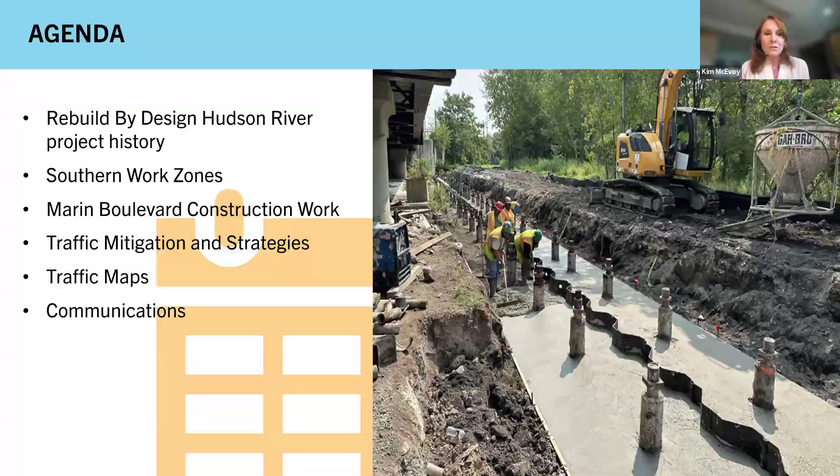But before we go into these specifics, next slide please. I'd like to introduce Mayor Bhalla of Hoboken for some remarks, and we appreciate your attendance today, Mayor.

Thank you, Kim. Good evening. I want to thank everyone for joining us today. I also want to start by expressing my appreciation to the New Jersey Department of Environmental Protection, really for your unwavering support and for your leadership on this project.

So today we're here to learn about the next phase of construction for Rebuild by Design, which, as you may know, is a federally funded, state-led initiative that was born out of the destruction that we saw and the devastation of Hurricane Sandy. So the next phase of this construction, which will lay the foundation of a deployable gate, is on Marin Boulevard to protect Hoboken against storm surge flooding.

That measure is one of many layers of protection being implemented, which includes, in addition to the gate, green infrastructure, stormwater detention, and other measures and systems to reduce the city's flood risk.

As many of us know, Hurricane Sandy caused widespread flooding in Hoboken, with over 500 million gallons of water inundating our streets, homes, and businesses. And what we're doing in this whole project of Rebuild by Design is trying to make sure that kind of destruction, that kind of horror, really never happens again.

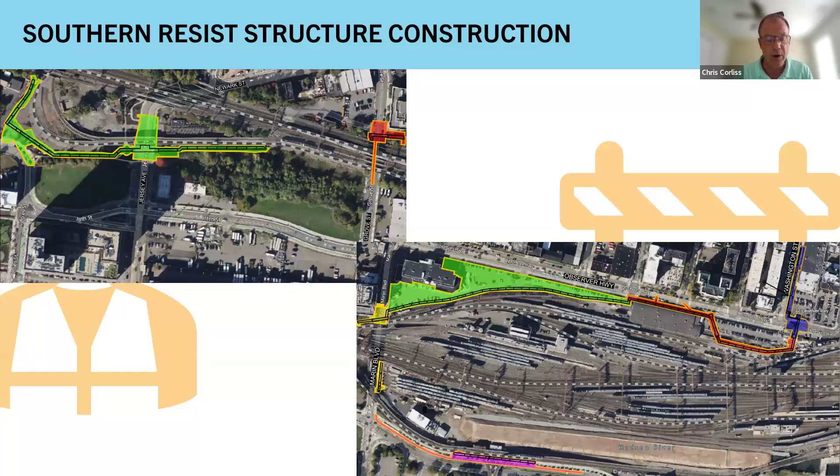These images depict where the work locations are: Jersey Avenue, Grove Street, over in the New Jersey Transit Yard and up Washington Street, and Marin Boulevard, which is where we're here to talk about tonight. Next slide, please.

So what's coming up on Marin Boulevard? The construction plan was developed in two stages, with consideration of safety, efficiency, and long-term durability of the final construction. Currently, the tentative start is the week of July 21st, and the closure is anticipated to be approximately 4 months.

Working down along the slides here is a generalistic progression of work. The first work occurring will be utility work - utility pole relocations and removals associated with PSE&G. Then subsurface work, including micropiles, sheet piles, jet grout installations, the wall foundation, as well as the structure - the slab that will go across the road, as well as the rails, new curbing, sidewalks, roadway paving, and pavement markings.

Currently, they're looking to do a second closure, which will be much shorter, next year - that's when the gates are anticipated to arrive. The gates are currently being fabricated in North Dakota, and they'll be shipped to Minnesota for final painting and then shipping to the site. So next summer, the gates in this location will show up and be installed. Next slide, please.

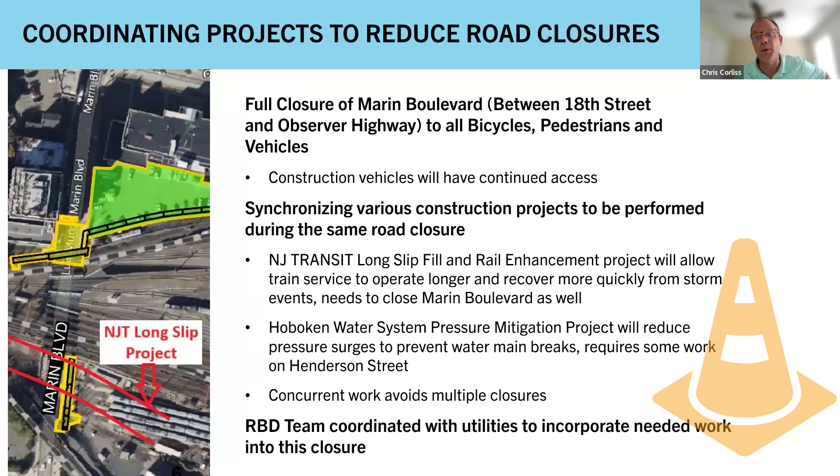Next slide, please. So we looked at different alternatives - could we open one lane of traffic? Could we open roads up at the end of the day? On the slide on the left, you'll see the yellow highlight is basically the final foundation of the system, of the structure going across Marin.

Now, there will be rails - think like rails as in train track, not like light rail type tracks - that'll go across the road. Those need to be set, and the foundations need to be poured as a monolithic pour, and those rails need to be installed at a very tight tolerance, so we need an uninterrupted run of track as per the design.

We did look at whether you could reopen the road at the end of each workday. Those foundation widths are quite large, so to steel plate or cover the excavations at the end of the day isn't safe. We also looked at whether you could do it with a constricted calendar, say only in the summer, but that would just increase the overall impacts and project duration. Next slide, please.

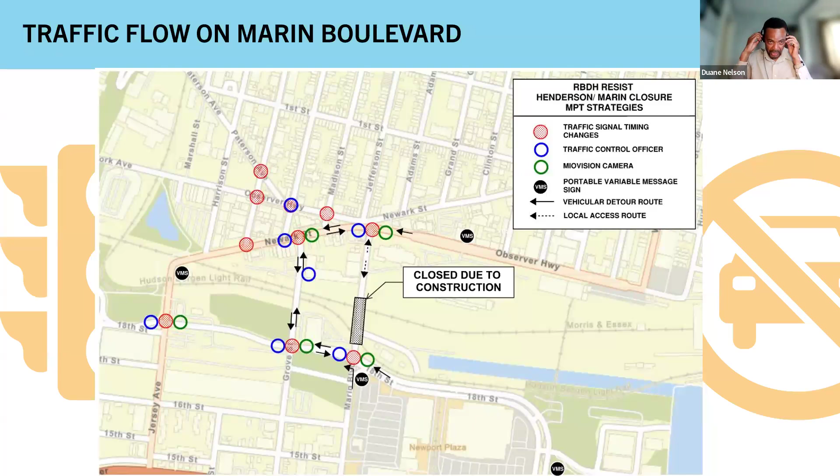What you see on your screen here is a map depicting several things, some of our strategies to help mitigate traffic as best we can. So we see Marin Boulevard, the closure area underneath the tracks. You see a number of symbols, and I'll run through them for you. The red circles with the red hatch are intersections where we have identified timing changes to be made to better handle the flow of traffic underneath the detour conditions.

The blue circles represent where there will be either a Hoboken Police Department officer or Jersey City Police Department officer to assist in directing traffic at the intersections immediately around the closure, along Observer Highway, Newark Street, 18th Street, and also an officer at the entrance to 700 Grove.

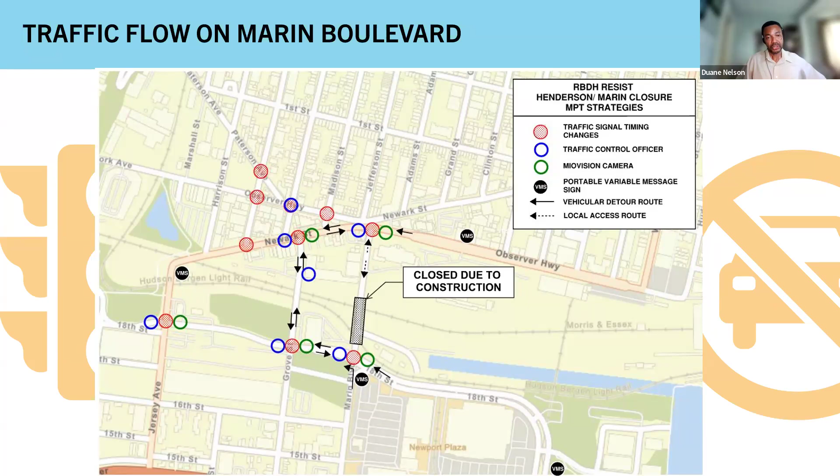In addition, these green circles represent intersections where we have cameras, which not only provide the team with live views of traffic, but also traffic statistics such as counts. They are integrated with the traffic signal controller, so they're able to provide us feedback on what is the best timing for the time of day.

There's also one other symbol I wanted to point out: these black circles with the letters VMS. That acronym stands for variable message signs. We have installed, or are going to install shortly, up to 6 around the area approaching the closure, alerting motorists of the upcoming closure, and then once it's in place, of the detour route, which is represented by these solid black arrows.

So if you're coming west on Observer Highway out of Hoboken, you will not be able to make a left onto Marin Boulevard except for local access to the few businesses and NJ Transit north of the actual closure. Otherwise, all general public would have to go west to Grove Street, make a left down Grove Street to 18th Street, make a left there, then a right back onto Marin Boulevard. From the other direction, if you're coming north on Marin, you would make a left on 18th Street, then a right on Grove Street, and then a right on Newark Street back to your original path.

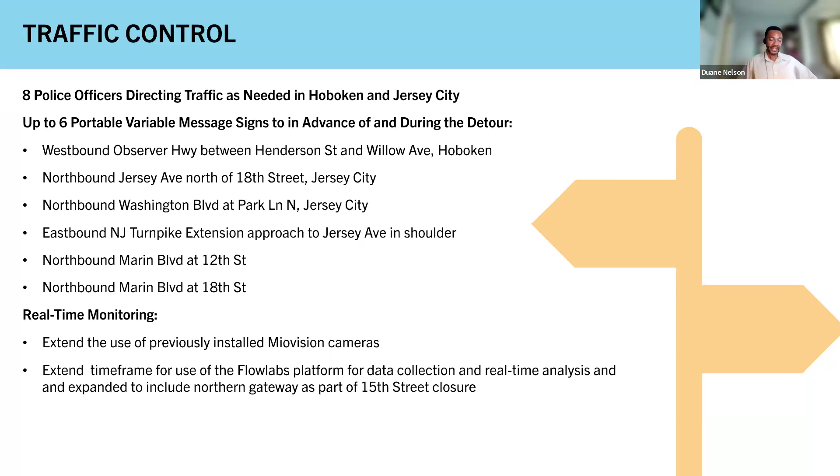As I mentioned, there are timing changes which will be placed into effect at up to 13 intersections surrounding the closure. The main brunt of the redirected flow will be felt along 18th Street, at Jersey Avenue, Grove Street, and Marin Boulevard, as well as on the Hoboken side at Observer and Marin, which would be closed, and at Newark Street, Grove Street, and Monroe Street, where they all come together. That would be another intersection where there would be significant modification to the timing to help manage the flow there.

Along with the signal timing, there are physical changes planned to deal with the detour route. There'll be updated signing and striping along 18th Street in Jersey City between Marin Boulevard and Grove Street, to include 2 westbound lanes and 1 eastbound lane, with updated striping at those two intersections of 18th and Marin and Grove and 18th to help facilitate the detour that will be in place.

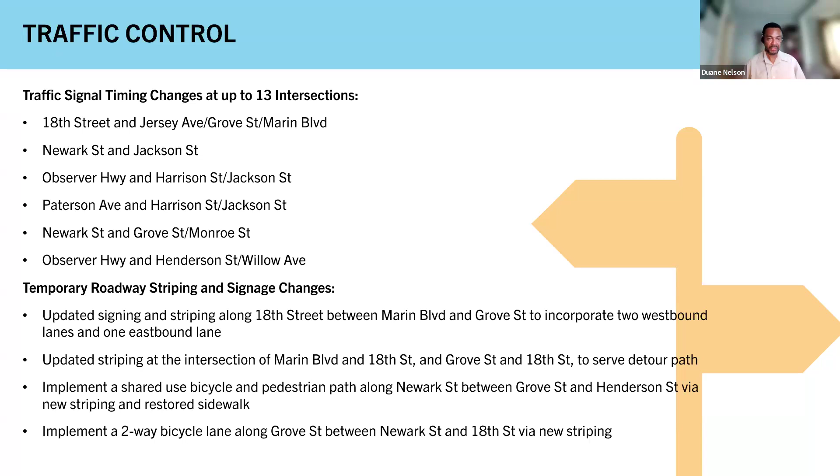There will also be a shared use bicycle and pedestrian path along Newark Street between Grove and Henderson, also Marin Boulevard, similar to what you see along Observer Highway east of Marin. Since Marin will be closed and that link between Hoboken and Jersey City will no longer be there, we're proposing to restore the sidewalk along Newark Street and connect to a two-way bicycle lane along Grove Street between Newark Street and 18th Street, where bikers can continue along the pre-existing bike lanes along 18th Street and Marin south of 18th Street.

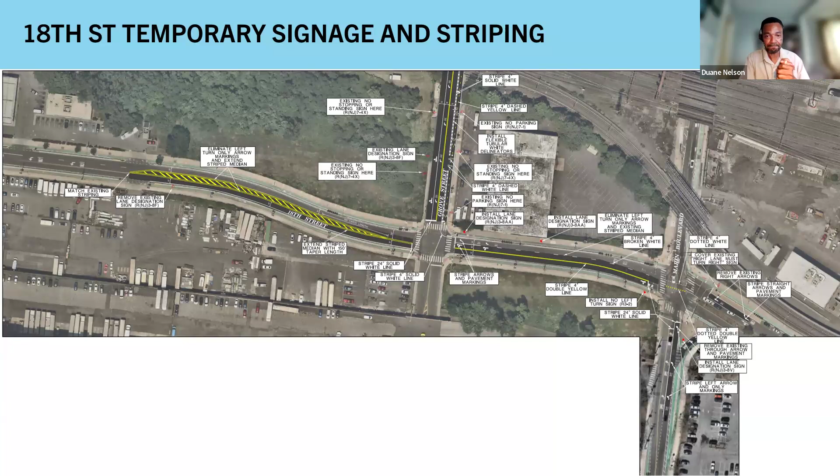This is what I was referring to. The existing sidewalk on the south side of Newark Street between Marin Boulevard and Grove Street, just off the left-hand side of the picture here, would be paved over. Right now the sidewalk is wide but in pretty poor shape. It would be paved over with asphalt and marked out with 2-way bike lanes and a pedestrian lane on the far right-hand side, beneath the 2 bike lanes. That would connect as you head east to the existing facility at Marin Boulevard and Observer Highway.

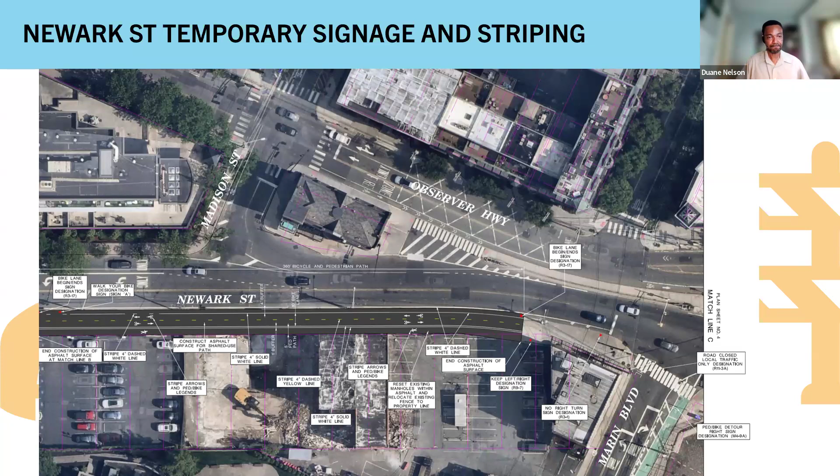This just shows some of the traffic control. As you approach the intersection, the left turn lane will be blocked off with drums, as traffic will not be able to turn on Marin except for the few vehicles that will need local access to the buildings along Marin Boulevard.

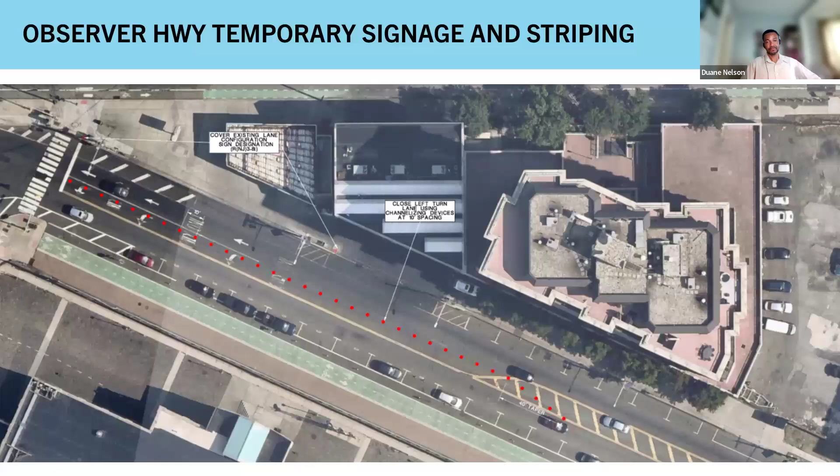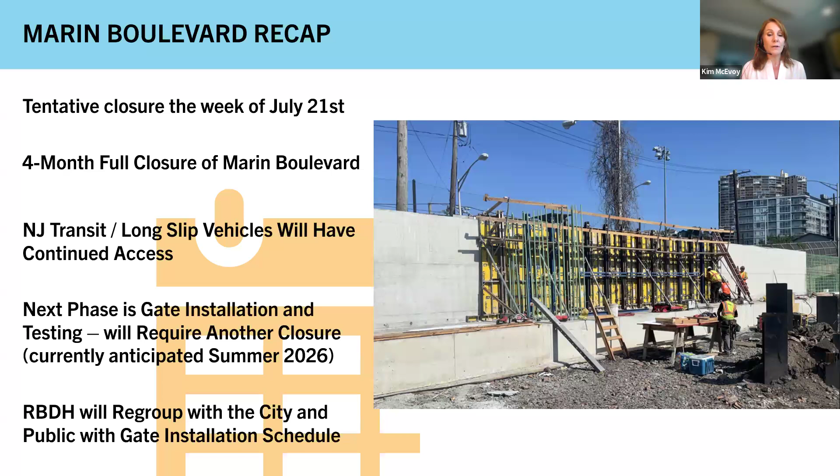Hello again. Just to recap, we're looking at a tentative closure the week of July 21st, estimated to be 4 months, with local access provided to buildings. We will also have coordination and continued access with New Jersey Transit for their long slip projects, so they'll have access to complete their construction on Marin. We are looking at another phase, which would be gate installation and testing, expected to be shorter in duration, looking for summer of 2026. We will regroup with your community on the gate installation schedule when we get closer in 2026, so we can inform you of that need.

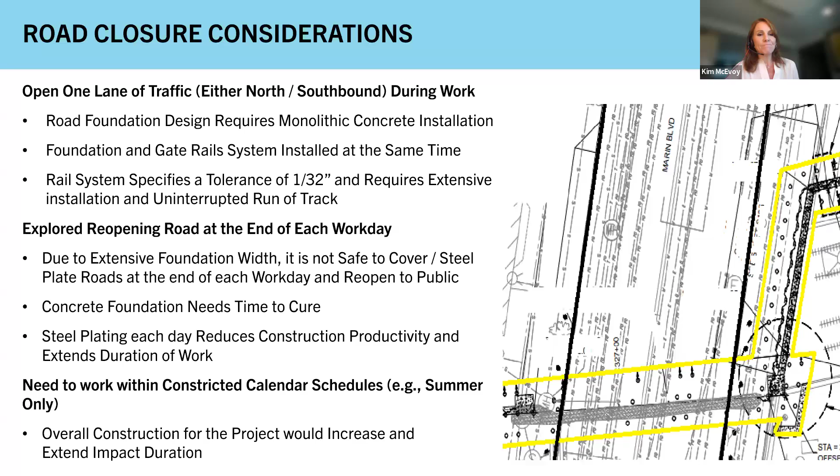So obviously with the closure, they will not have access to and from the south, but they will have access to and from the north to Observer Highway on the Hoboken side. There will be an officer there who will help direct traffic, so if somebody is making a left there, they can help them make that maneuver, and the same vice versa coming out. The traffic light is still there, so if you're coming out, the light would still turn green for you if you're coming north on Marin to exit those buildings.

And similar question. Yeah, and I just want to reiterate that during the construction, local access will be maintained. So that is the intent of the flow you see here, and this map will be provided on our website along with Hoboken's announcements.

In addition, we received several questions related to access for 700 Grove. How will access be provided to the 700 Grove Street garage? What hours will officers be placed at the intersections, specifically near 700 Grove? And noting that they also have no parking for deliveries, so where will a delivery vehicle park, with specific suggestions for signage that we will provide to the project team as well.

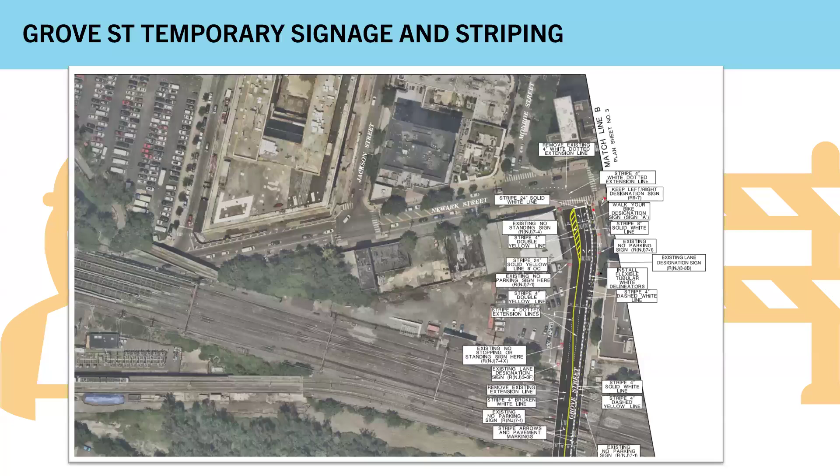And a question as to whether Grove will no longer have parking on the east side due to the bike lane. Yes, it will not have parking in the bike lane.

There are a few questions regarding traffic cameras - unclear if it's all regarding traffic cameras or traffic and security cameras, but there were questions as to whether we can have cameras installed on Grove Street, specifically outside 700 Grove. Sure, yes, that's a possibility - you can definitely work with Jersey City on that. The cameras I mentioned as part of the mitigations are more immediately at the intersection, and they're not security cameras, they're more for counting traffic. But it sounds like the question is more about a security measure, to see any incidents and what's actually happening with a higher resolution at the driveway. We could definitely make that request to Jersey City and the rest of the team, to see if that's something that could be installed there.

Question regarding possibly restricting access to private bus services like Greyhound through Hoboken or Jersey City during the closure.

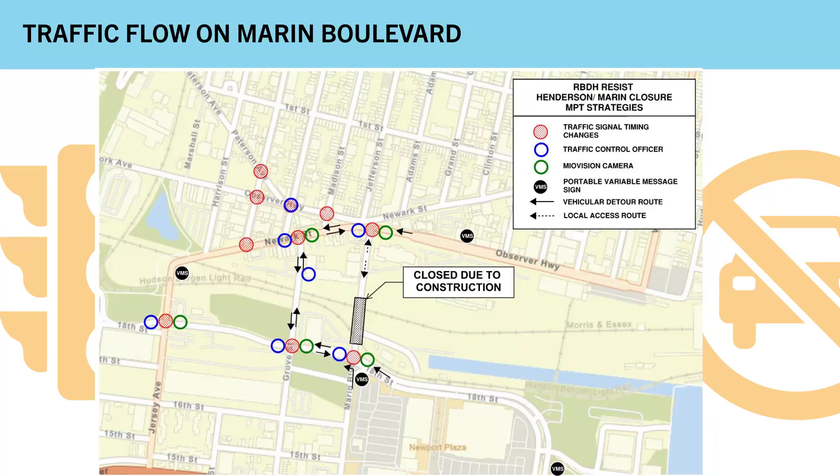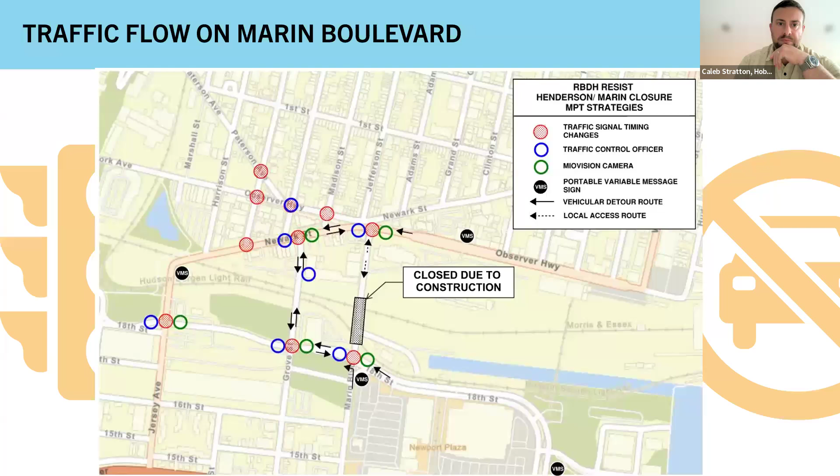Sure. So the DEP, on behalf of the city, has submitted a conditional letter of map revision which would revise both the extent and depth of the floodplain in Hoboken. We expect that to produce significant savings related to the National Flood Insurance Program, not just existing premiums, but future offsets of whatever escalation risk rating 2.0 implements within the program.

My email address is cstratton@hobokennj.gov. I think there's a typo on the last slide - there's an extra period, but it's cstratton@hobokennj.gov, no period between Hoboken and NJ.

I can send you the letter of map revision as well as the hydrology and flood risk report the DEP did, which has modeling showing both those changes in extent and depth. I'm happy to further engage on that topic. But yes, it will change the floodplain in Hoboken specifically, as well as the Soho neighborhood in Jersey City.

So in addition to what we heard this evening, which were a tremendous number of questions that we will refer to Jersey City officials regarding traffic and traffic control, we received significant feedback regarding police presence and discussion about potentially increasing police presence, increasing enforcement and/or fines. These are questions we will certainly take back to Jersey City and come back to this group with further responses.

I know we're at 7 o'clock right now, and we had anticipated approximately one hour for this meeting. We certainly have plenty of follow-up, and we will continue to work with DEP to ensure we can provide follow-up to those who participated in this call. Thank you for registering. We can provide you with further information through the methods shown on the screen here, and you can anticipate hearing more from the DEP.